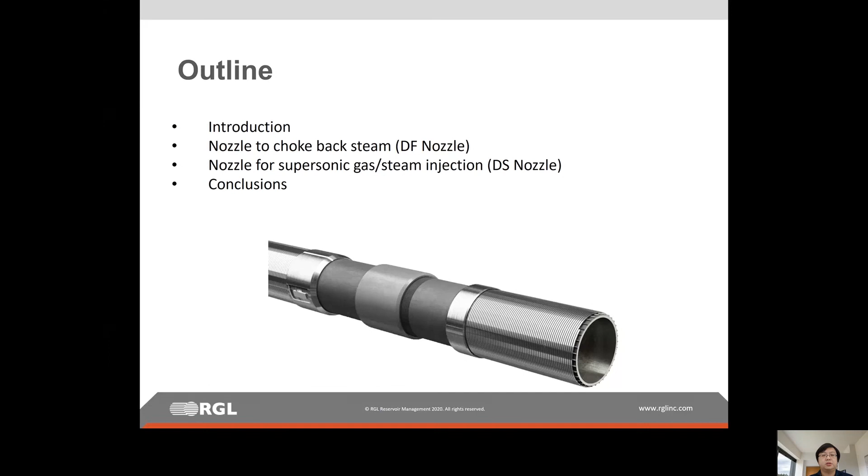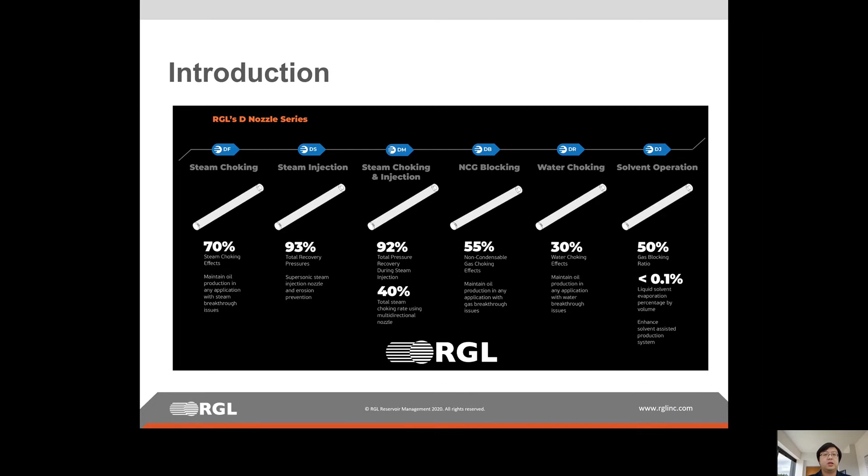And we have an NCG blocking nozzle, the DB nozzle, and a water choking nozzle without moving parts called the DR nozzle. And recently we have designed and patented a DJ nozzle. It's for solvent operation. So today, as I said, we will focus on the first and second nozzles, the DF and DS nozzles.

Okay, so DF nozzle is an inflow control nozzle for steam choking, and its design philosophy is that our goal by using DF nozzle here is to increase the emulsion production rate and to reduce the steam production rate as much as we can. To achieve this goal, we want to utilize the flashing mechanism and we want to get the unwanted fluids fully flashed or get flashed as much as we can.

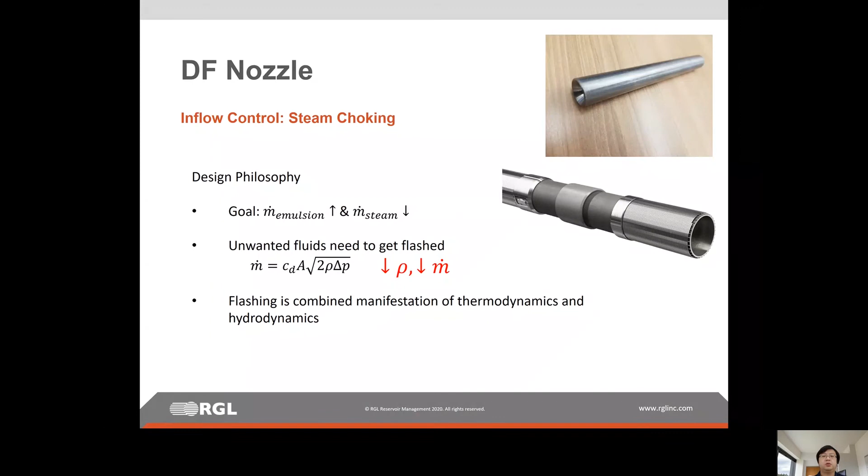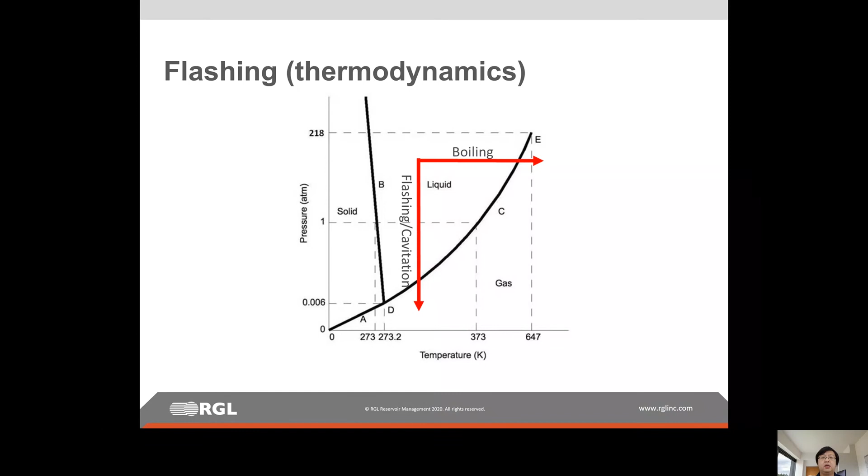And the flashing itself is a combined manifestation of thermodynamics and hydrodynamics. So we will go through the flashing mechanism in detail in the following slides. From thermodynamics point of view, flashing or cavitation is very similar to boiling, and they are both about the liquid getting into the multiphase liquid and vapor regime. And the difference is that flashing is a process under constant temperature, while boiling refers to the process at constant pressure. But besides that, there is a further fundamental difference, and we'll show that later.

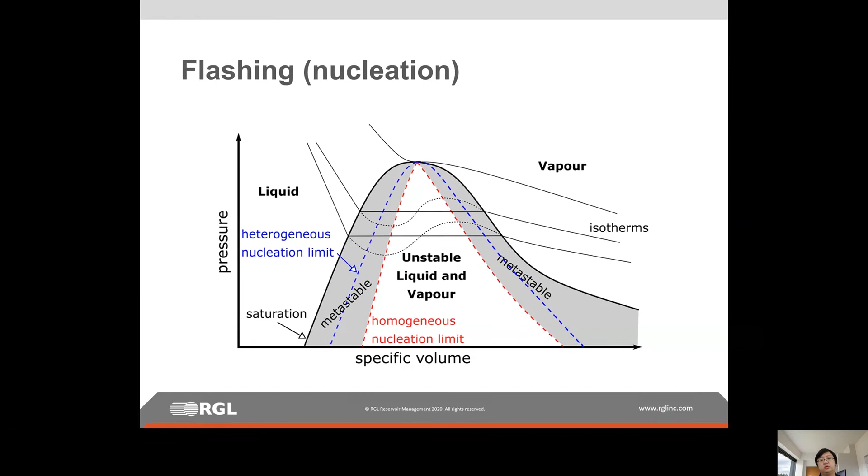And this dashed curve is called the van der Waals curve. The interesting fact is that the areas enclosed by the dashed curve and the horizontal black line are equal to each other. That is because the integral of the Gibbs free energy along this line is equal to 0. And the reason that we study nucleation is that nucleation can enhance flashing, or it can promote flashing. So that's why we need to take it into consideration when we design a nozzle and when we select the surface roughness of the nozzle and also the material of the nozzle.

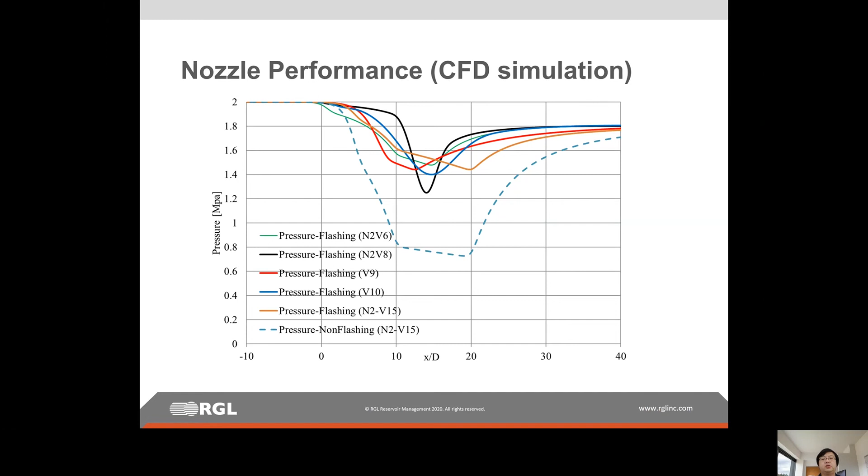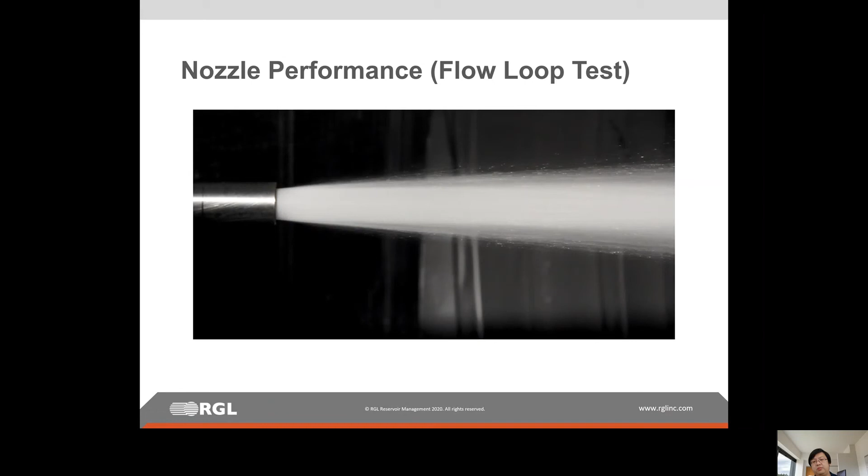So this video shows the flow loop test that we performed in a third-party lab, and the upstream condition is a saturation condition, which means that any pressure drop downstream will trigger flashing. What we are showing here is the outlet condition. We can see that the multiphase flow is coming out from the outlet of the nozzle, and the wet steam is very intermittent and very unstable. This is meeting our expectation.

So the other thing is we need to evaluate the nozzle performance, and there used to be two groups of thoughts in terms of the nozzle evaluation for steam choking effects. One group of people said, well, our goal is to produce as much liquid as possible, so the liquid discharge coefficient, the liquid flow rate, is what we want to improve. And the other group of people say, no, actually the biggest enemy of thermal operation is steam choking, so we want to choke back as much steam as possible. So what we are doing here is to combine these two thoughts together, and this is actually a balancing act. So we developed this measure.

It's called the steam choking ratio. It is defined as the mass flow rate of the cold liquid versus the actual mass flow rate. So we can see that if there is no steam, this ratio will be equal to 1. But if there is flashing, so that the actual mass flow rate will be reduced, this ratio will be higher, will be greater than 1.

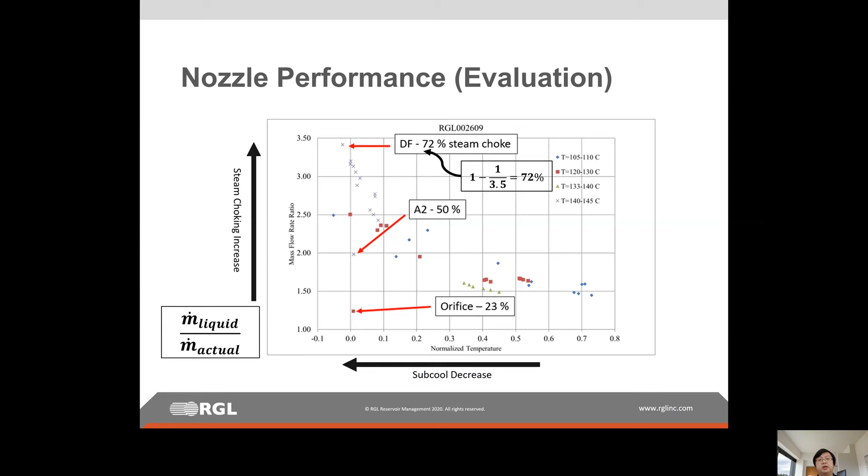So we tested a few of our nozzles, and also the orifice. So we can see that the orifice can choke back 23% of the steam, and our DF nozzle can choke back 72% of the steam at saturation condition.

So we can see that after some time, the size of the bubble in flashing is way bigger than that of boiling, and that is particularly the reason why flashing is so much more violent than boiling, and flashing can damage. Actually, if we do some back of envelope calculation, we'll find that even with diffusion effects or other viscous effects, the temperature and pressure in a collapsing bubble during flashing can still be 5,000 degrees Celsius and 10 to the 5 psi. These are really amazing numbers.

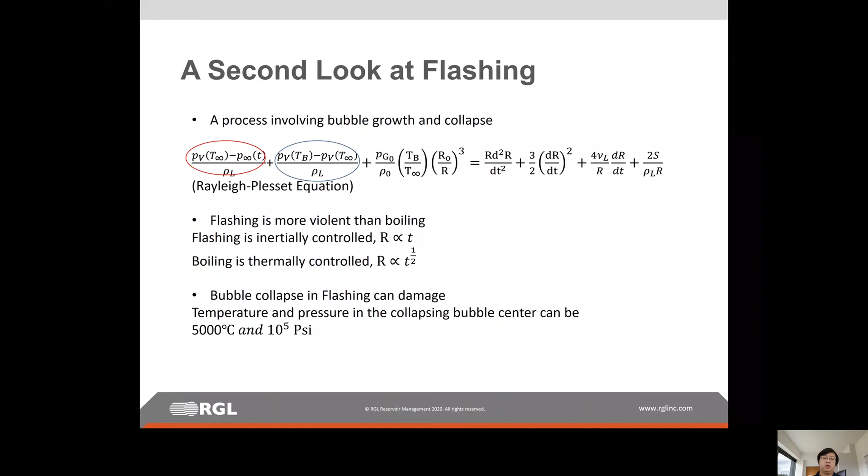But fortunately, this collapsing process will only happen in microseconds. So if it just happens for a short period of time, we don't have to worry too much about that. But when we design the nozzle and select the nozzle material, flashing and its consequent damage should be considered.

Okay, so that was the DF nozzle, and now we are talking about the DS nozzle. It is an outflow control nozzle for supersonic steam or gas injection, and if we want to inject steam or gas at supersonic speed, we want to get the pressure recovery ratio as high as we can, so that we will not lose a lot of total pressure along the way.

So in comparison, when we use a conventional nozzle or port, if we want to reach Mach 1 at the throat, the downstream pressure will have to be less than 0.56, or 56% of the upstream inlet pressure. And that means 44% of the total pressure will be lost on the way. That 44% of the total pressure could do useful work to recover more oil, and there is a lot of cost associated.

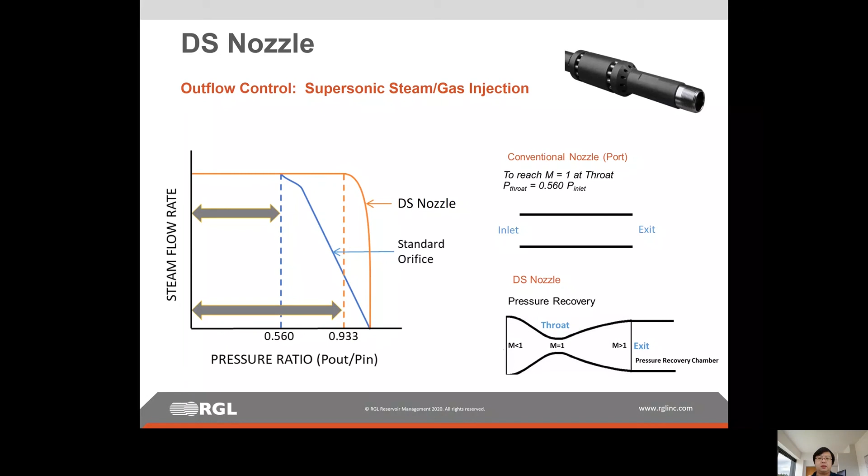But if we use the DS nozzle, we can see that its pressure recovery ratio is 93%, and we will only lose 7% of the total pressure. So 44% compared to 7%, the efficiency improvement and cost saving is right there.

So that is because when you use a DS nozzle to inject steam at supersonic speed, since its pressure recovery efficiency is much higher, that means you do not need very high upstream pressure to inject steam at supersonic speed. And a lower upstream pressure means lower saturation temperature, and then the heat loss from the tubing or casing to the reservoir will be reduced correspondingly. So that is why the DS nozzle can save a lot of energy.

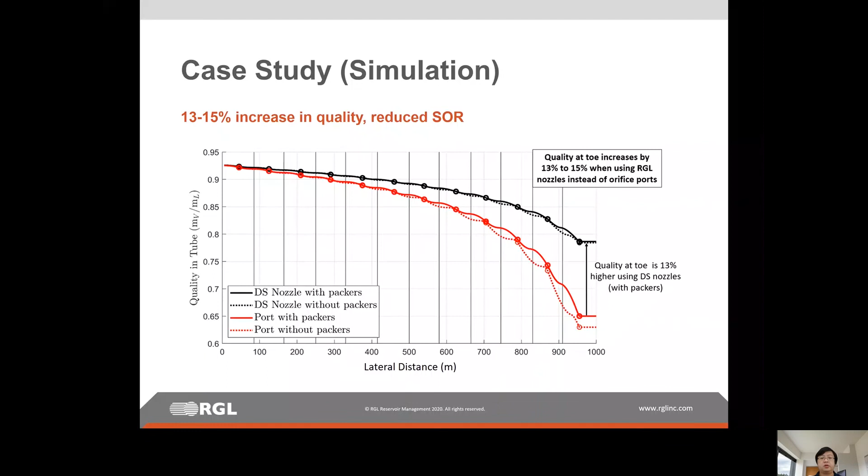And the DS nozzle will be particularly useful when you drill long horizontal wells, say 1,500 or 1,800 meter long horizontal wells. It will keep the heat all the way to the toe.

Okay, so here we are taking a second look at supersonic gas or steam injection, and the key to designing a supersonic nozzle is to reduce the increase of entropy. There are many ways to achieve that, but you have to find a way to reduce the increase of entropy as much as you can. Then the efficiency can be improved.

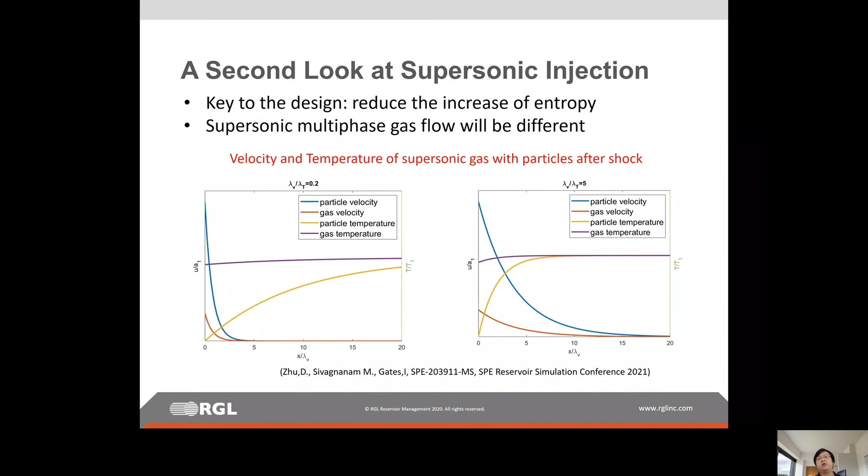And if the velocity relaxation time is longer than the temperature relaxation time, we can see that the velocity between particle and gas will converge much more slowly compared to the temperature. And again, this is just one level above the ideal case, and we are still working on some multi-phase cases with heat transfer and with particle interactions.

Okay, so here are the conclusions. As we can see, steam-related problems are very interesting because they can be multi-phase. They are in a non-equilibrium state, but on the other side, these complications are making steam-related FCD design very difficult, very challenging in terms of nozzle design and in terms of flow loop testing and operations.

So the success of FCD requires extensive knowledge and also joint industry collaboration between the vendors and the operators. So the entire industry needs to work together to tackle this problem and to better the operations. And today I'm just showing you some of our understanding on the flow control device and the thermal related nozzles. As you can see, there is still a lot of room for further development and optimization of flow control devices. So I think the entire industry needs to work together and get it better.

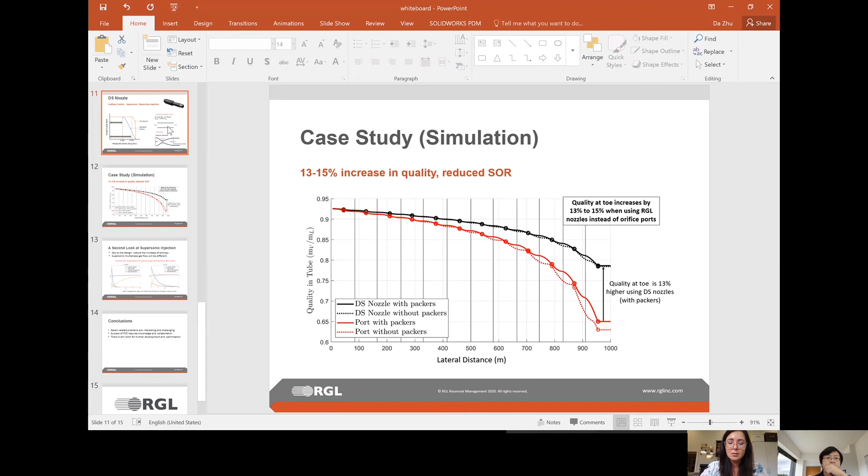Great questions. Okay, we have a question from David. He wants to know, what do supersonic flows at the end of the nozzle mean for erosion? That's a very good question. So we want the supersonic. That is associated with the actual nozzle geometry and the nozzle design. And that is why our DS nozzle has a pressure recovery chamber. The function of that pressure recovery chamber is to recover pressure, and also we want the shock wave to stand inside of the nozzle,

so that the velocity of the steam will be significantly decelerated, which means that what you will have at the exit point of the DS nozzle will not be supersonic, it will be subsonic. So there will be very minimal concern on erosion. Actually, the speed of the gas or the steam at the outlet will only be about 40 meters per second. Yeah.